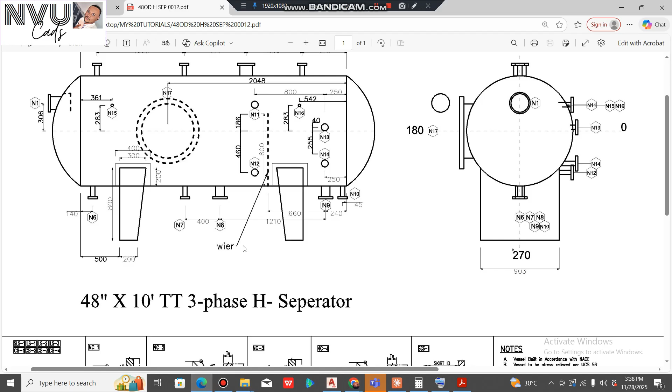I did make a post yesterday, I think, about a three-phase horizontal separator and about the mechanical drawing and how to model it. I said I was going to do a modeling of the horizontal separator based on the mechanical drawing that I also shared.

Well, this was because for some time now, some persons have reached out to me in one way or the other via WhatsApp as well as on LinkedIn. They wanted me to at least show some demonstration on how they can get started with modeling a vessel. I think some persons have asked because they got stuck along the way, and after trying, they actually couldn't find what they were looking for, so they had to ask that I guide and help direct them on how they can get familiarized with it.

So I decided to do this demonstration so that it solves the problem of those that asked me to do the demonstration earlier, and those that just asked me recently, so that if they could get their hands on the video of this demonstration, it would be able to solve the challenges or whatever questions they need answered. So that's why I'm doing this demonstration, and I'm going to, as fast as I can, touch this mechanical drawing and help them get a better understanding of it.

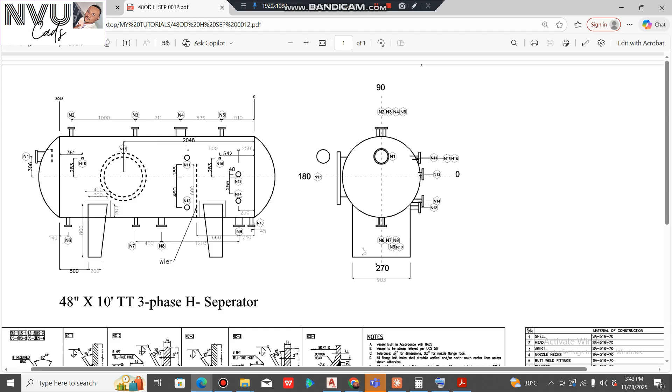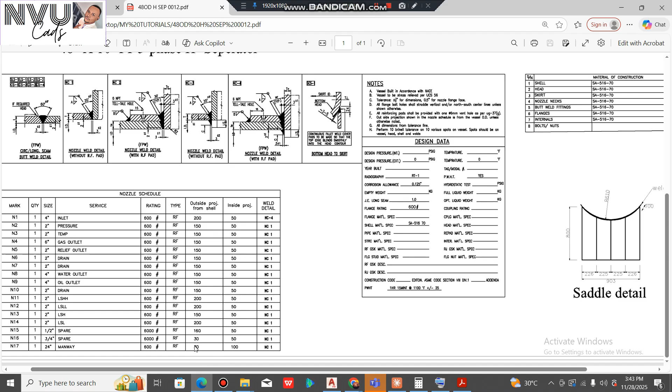So we have this drawing. This is the side view, this is the front view, and then this is the nozzle schedule. Also in this nozzle schedule there were some little changes that were made. Okay, so it may also not be perfect, but along the line we'll look at it. Then we have the saddle details. This saddle detail, we would only be working with the length, the height and the length of the base, because the other details are just for fabrication.

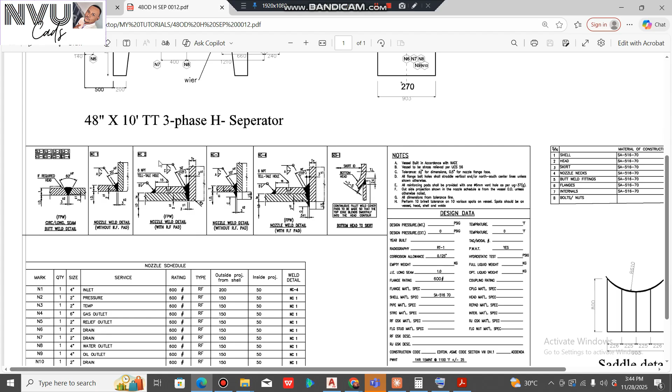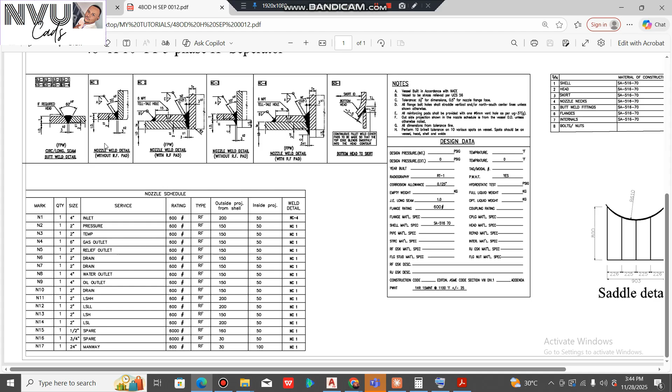So let's dive in. This is a vessel that has quite a lot of nozzles, as well as a manway and a saddle. So the nozzle schedule has been outlined here: the rating, the type, which is raised face, as well as the outside distance. This is actually the projection of the nozzle. Some nozzles are projected more from the vessel, while others are not. And these are the inside projections. What you also have here is weld details. This is actually what the welding engineer would be interpreting for fabrication. So we'll not really be going into all of this.

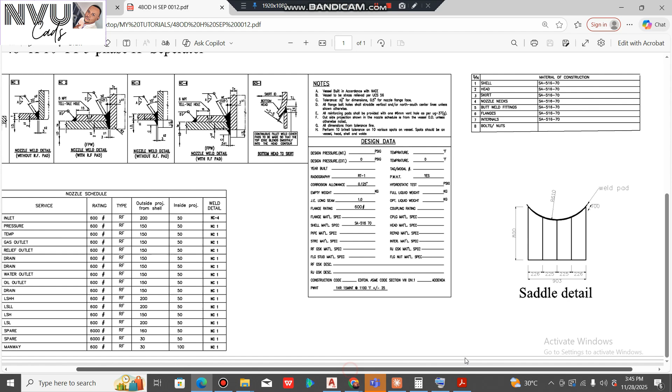What we'll be focusing on is the vessel: the 2D drawing showing the front and the side view, the nozzle schedule, and the saddle details. So we'll be interfacing between this and the software to get information and move on. So that's it. Let's go straight to the software. I'm using AutoCAD Plant 3D, which is my basic software that I use in process piping designs and every other activity. So I've created a project.

I created this project using the option of mixed, which is imperial and metric, and it just makes it more flexible, so you're not limited to either of the dimensions. So I presume all of those have been done, and this interface also, I presume, before we get to this stage, we must have understood what the interface is. So I will not be speaking about those. I'm just going straight to the design.

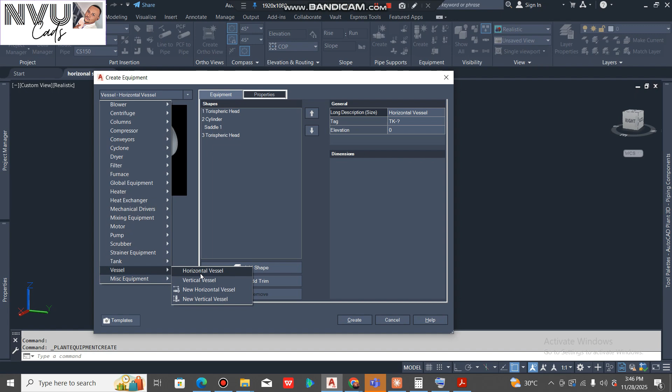So I've created a drawing and I'm opening it. This is what it is. So this is a blank drawing. We don't have anything. So to begin, I go straight to my home tab, and then equipment tab. AutoCAD has been able to give us quite a lot of equipment that we can work with, but we're going to a vessel and then a horizontal vessel, which is what we'll have.

Now, I tried doing a little demonstration before this video, while I was testing the mechanical drawing, because I needed to test it to be sure that it's workable. So I still have some information that would now be left in the memory of the software. So while we are working, there are some places that I wouldn't need to input. I will just explain because I had already inputted them, so you'll just be seeing them on the screen like pre-populated.

But however, once you select your vessel, the system automatically generates the torispherical head, generates the cylinder, and generates the other torispherical head. As a horizontal vessel, it has two dish ends, one head on one side and the other at the opposite side. And typically the cylinder must have its saddle, so that's why you're seeing this saddle under the cylinder. The saddles are like the legs, and since this is a horizontal vessel, it has saddles.

Vertical vessels come with skirts rather. So if it's for a vertical vessel, what you'll be seeing here is a skirt, or in some cases you have legs, which are like tripods, or in some cases 4 legs or more. But in this case, we are just dealing with a horizontal vessel, which has saddles. So these are what we'll be editing based on that drawing that we've seen before we start inputting the nozzles.

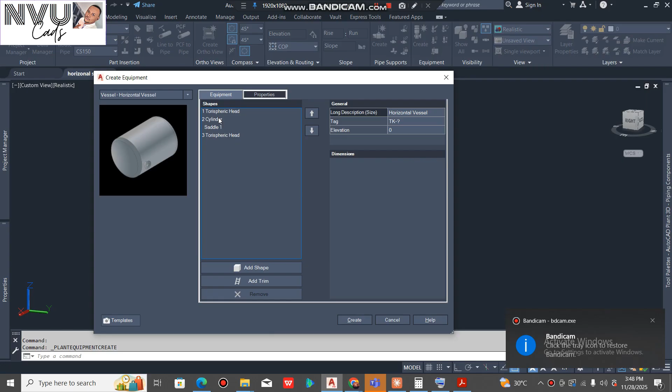Okay, so now let's include the cylinder. For the cylinder, we have to input the diameter, which is given here as D, and the height, which is given as H. The system has been built in a way that once you determine the diameter of this, that same diameter will automatically be assigned to the heads, the dish ends. So if you use 60-inch, the torispherical head will change to 60-inch.

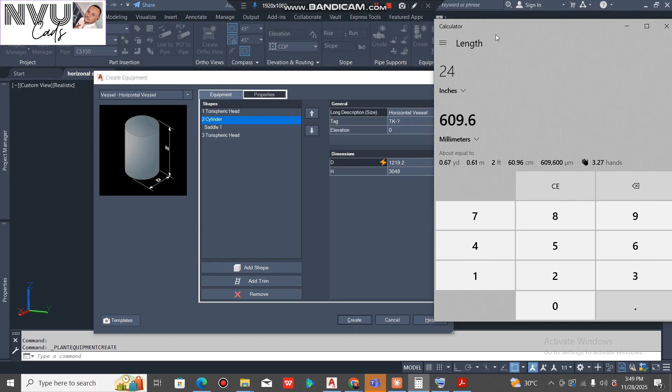If you put the diameter here as 24-inch, the torispherical head will be changed to 24-inch. That's how easy the software has made our job look. So in most cases when I'm doing this, I use a calculator, because the calculator helps me to convert easily and get what I want. So we are using the calculator and want to input the diameter of this vessel.

So if you go to our drawing, you see that this is the dimension of the vessel that was given. Usually it comes in this way. Diameter usually comes first before you see the length. Diameter is in inches while length is in feet. So once you see this, you should understand that this is a 48-inch diameter by 10 feet length vessel. So 48-inch is what we'll be converting in our calculator.

Once we input 48-inch there, it will convert it directly to millimeter, because what we are working with here is in millimeter. So you are having 1219.2. I told you I've done this before, so this is already in the memory of the software. So if you've not done it, you can input your own value here, 1219.2.

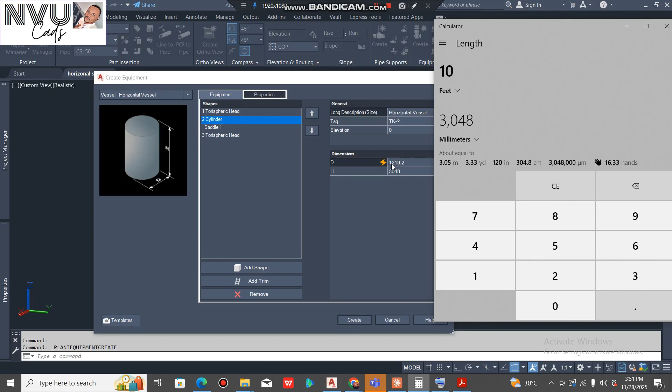Now the next thing we are looking at is the length, which in the software is called a height. So convert this from feet. This is how I do it, and I put 10 feet. 10 feet is giving me 3048 millimeters, 3.048 meters. So 3048 is what you input here. So once you've done this, the software automatically generates the other ones.

You see the torispherical head is having the same number both up and down. Now let's move to the saddle. Now I told you the saddles are the legs for each of these, the two legs that the vessel carries. Saddles are usually in pairs, especially for vessels like this, except in some rare cases which will not be discussed here. It's usually in pairs. Let's not go there. So that's basically what it is.

So what we'll be starting with now is the saddle height. This is telling us that our height needs to be calculated from the middle of the vessel to the base of the saddle. From the middle of the vessel to the base of the saddle. That is what the height is going to be.

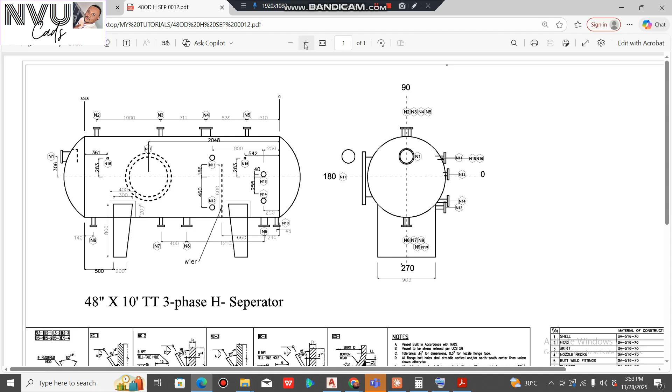If we look at our design, we realize that this information is not how it was given. The way the software is requesting it is not how it was given in the design, but we'll have to figure it out. Now let's look at the drawing closely. What it's simply asking is the height from this point down, looking at my mouse, to this bottom of the saddle. But what we're given here is just the height of the saddle from here to this point, meaning that we don't have the other ones.

And we also see that 200 has projected into this part of the vessel. So what we have left from this line down to this place will have to be 600. So to get the total length, we now have to take half of this and add it to the 600. That will give us the total length, which is what the software is asking.

So to do that, let's go back to our calculator and convert back to inch. Since the total of the vessel is 48 inch, half of it will have to be 24. So let's look at what 24 inch is in millimeters: 609.6. So 609.6, we'll now have to add it to 600. Let's copy and go to standard calculator, paste it, then add 600. The 600 is the remaining part of this saddle, since 200 has already projected into the vessel.

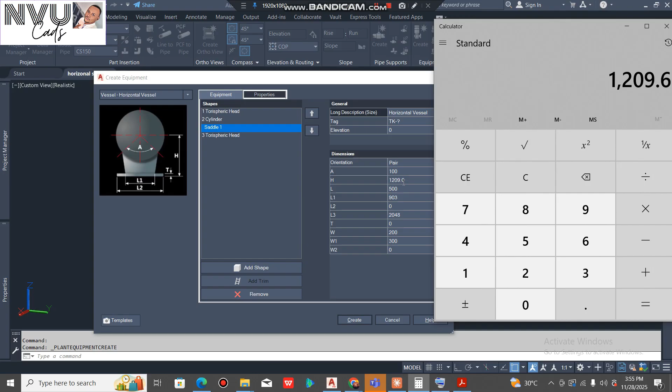So adding plus 600 equals 1209.6. So this is what our height is going to be. And like I said, I've done this before, so we have it already pre-populated here, 1209.6.

Now our length, which is L, I want to follow this serially so we don't miss anyone. Our L is the distance between the tan and the middle of the saddle. In this case, it was not given exactly the way the software wants. Sometimes the way the software is designed would not be the same way the mechanical drawing is designed, so we would have to do addition and subtraction to get what we want. Since we are only given 500 from this point to this point, we have to look for the middle of this, so that once we add it to 500, we'll get what the software is asking for.

Now, bear in mind that in the software, it was stated at the top, but in reality, what they use is the base, not the top. That's why if you look here, the arrow came down to this point, else they would have used it somewhere here. So it's the base that is the reference. So it is this 200 that we are looking for the middle of, not the 300. If we take half of this 200, the length of the base, which is 100, and add it to this 500, we get 600, and then we input 600 in our software.

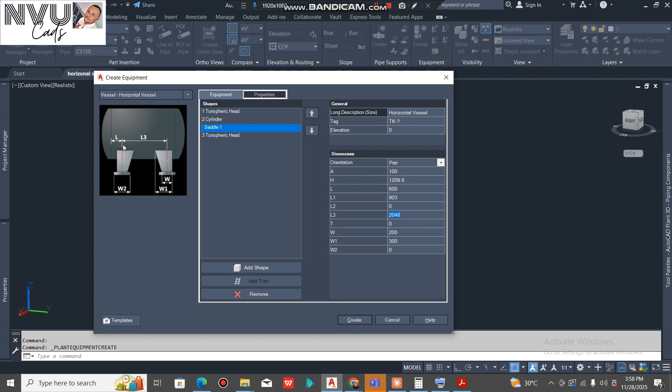And our L2 is this length. If we look at our design, we do not have any base plates for this saddle, meaning that in this case L2 is not applicable. That's why L2 is 0. Now our L3 is the distance between the middle of this saddle and the middle of the other saddle. Now we'll go back to the software. There's something I want us to understand.

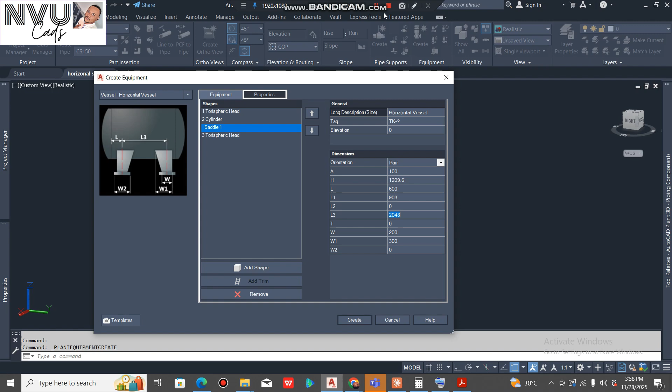Whatsoever, let me use the software rather. Whatsoever you're having as our L here, once you input it, the software will assign the same thing to the other side. Software will assign the same thing to the opposite side. Understand? So if we are having 600 here, that means this place will also be 600.

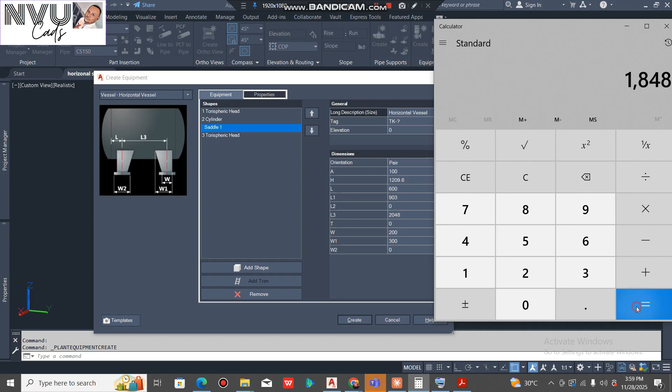So once we have that at the back of our mind, it will now be 600 plus 600, that is 1200. So for us to get the center to center of this, we have to minus 1200 from the total length of this vessel. To do that, we go back to our software. Our total length is 3048. So to remove 600 plus 600, it should be 1200, so it should be minus 1200 equals 1848. So this is going to be what our L3 will be, 1848. So L3, 1848. So we are progressing.

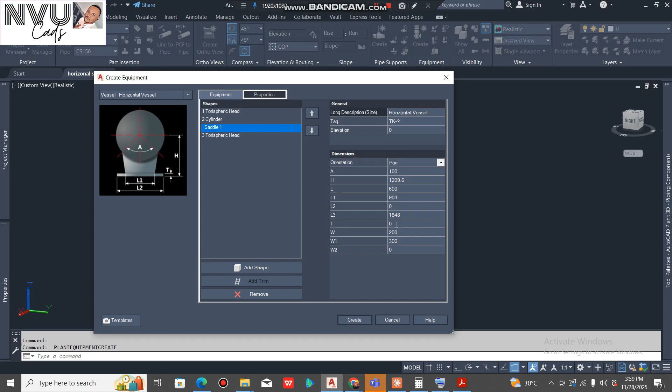Our T is now the thickness of the base plate. Initially, I've told you that we don't have a base plate, which is why we put 0 for L2. The same thing will be applicable here. We don't have, so T will be 0. Now I have W. W is the width of our saddle base. So from our software, the width is 200. So that's why we're having 200 here.

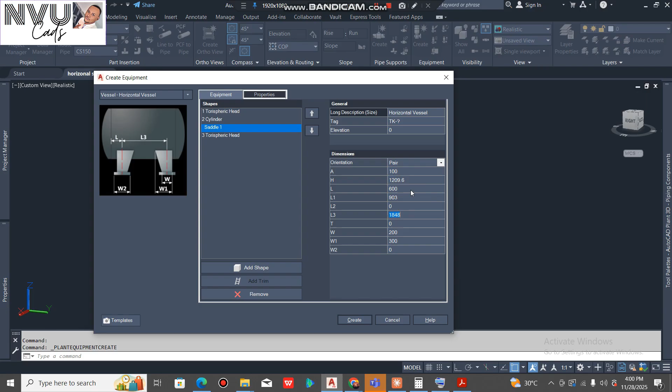And then W1, which is, for trace, you see it's the top of the saddle. In this case, we are having it as 300. So the 300 we have here. And then W2. W2 is also that base plate that we don't have, so that's why we're still having it as 0. So at this point, we've been able to put in everything that the software needs from us, and so we can create. Fine.

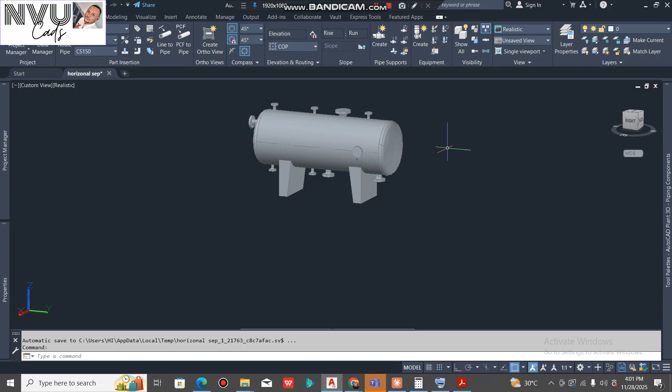Okay, I just noticed something. The vessel I created initially is still here. So what I will do is I will just remove all the nozzles and create them again, so that it's not confusing, so that everybody would be able to follow. So just give me a few minutes. Let me delete them.

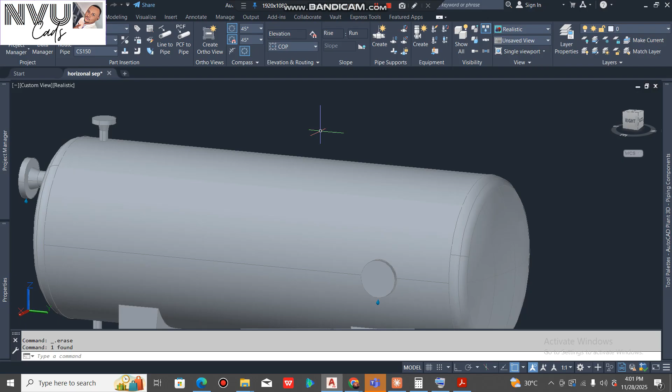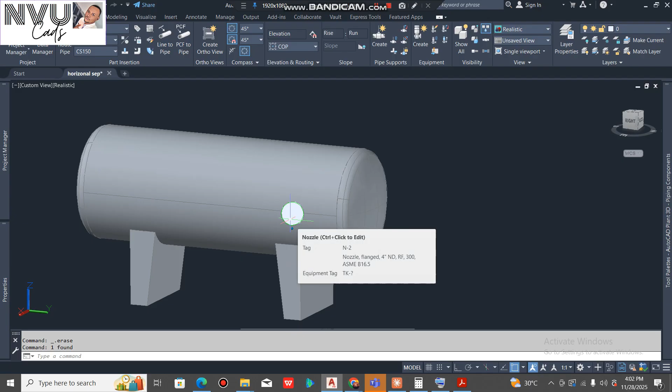Okay. Okay. Okay. Sorry. I just want to have them deleted, so that we create a new one. And the last one.

However, not sometimes, always, once you create a vessel, the system automatically generates some nozzles for you. So you can modify, but in this case, I've just deleted both the ones that I created and the ones that the system created. So we will not be having any nozzle on the vessel until we start creating.

So I want to explain something before we move. For these two dish ends, these torispherical dish ends, one is usually considered the head, the top rather, and one is considered the bottom. If we look at our drawing, we realize that one part of it starts with 0 and the other part is the end. The system recognizes this dish that starts with 0 as the bottom, and this one that gets to the maximum length of the vessel is where the system considers as the top.

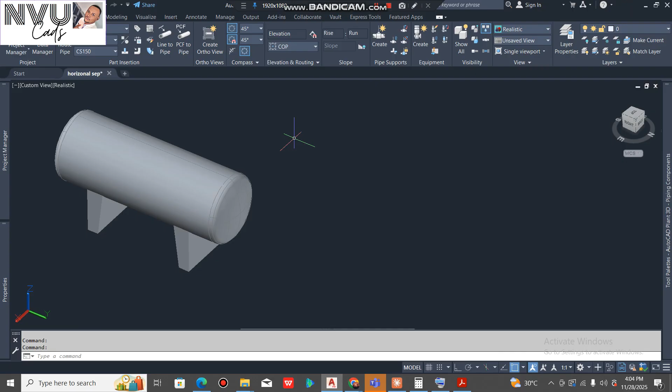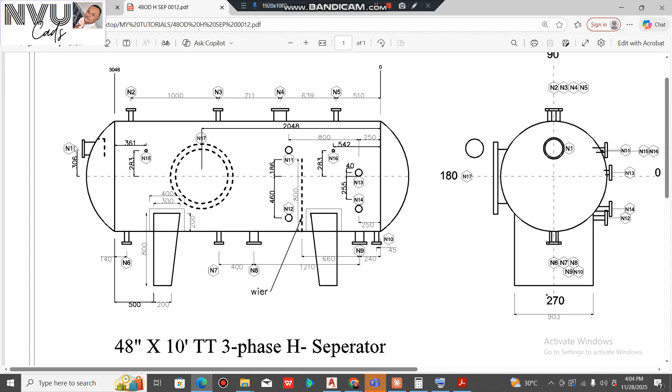Yeah, so we would use that reference to help us know how to position nozzles. So having created a vessel, let's look at it closely. Fine, so everything looks fine now. So I want to create a nozzle. So let's get to the drawing rather. I want us to start with N1.

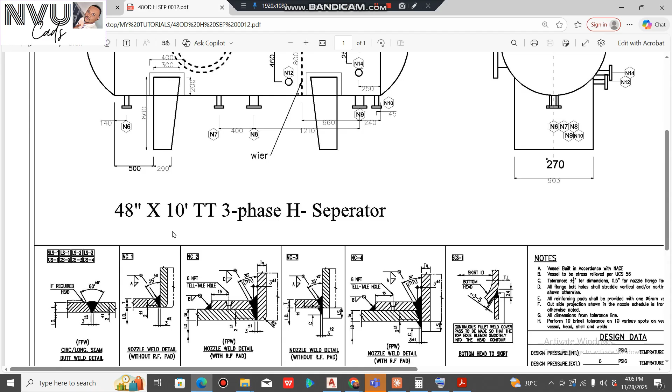N1 is this. If we look at our nozzle, see that N1 is a 4-inch nozzle, 600 pounds rating, raised face, 200 projection. So it's a 4-inch. So we create: right click, add nozzle. Now this nozzle, I've told you that it is at this side. So where you're having this is top, this is bottom. So I have to put this nozzle at the top on the software. So we choose here and we'll go to top.

The nozzle comes here. So we'll do modification. Now it says radius. Radius, in other words, is usually the distance from here to where you have the center of the nozzle. That is the radius. If it's for the top, it's the distance from this reference to where you have this, or where you have this.

So in this case, the radius here will be 510. In this case, the radius here will be 306, because the software sees a reference on the dish. It sees the reference from the tan, which is this. But for here, it sees the reference from the center line. Yeah, so it's either you reference it up or you reference it down. As we progress, we'll see that.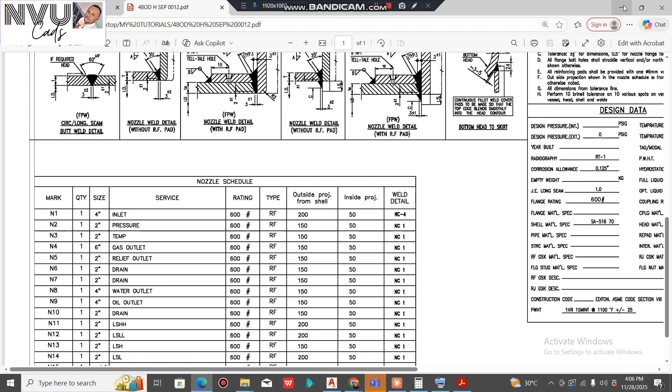So in this case, our reference for this nozzle is 306. So we input 306 here, 306. Then our length, as we've seen, which is the outside projection, is 200. So we go back there, we input 200, and then angle. This angle now is also what we'll be looking at.

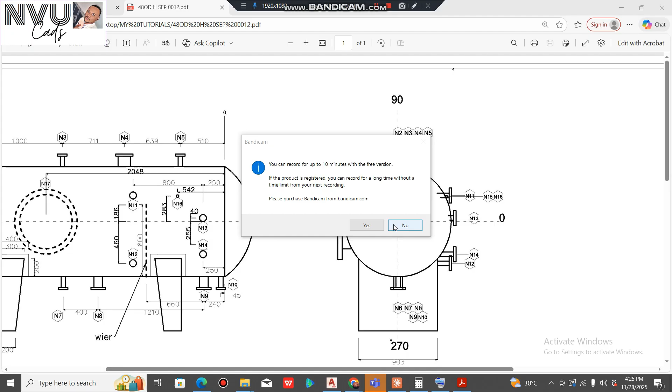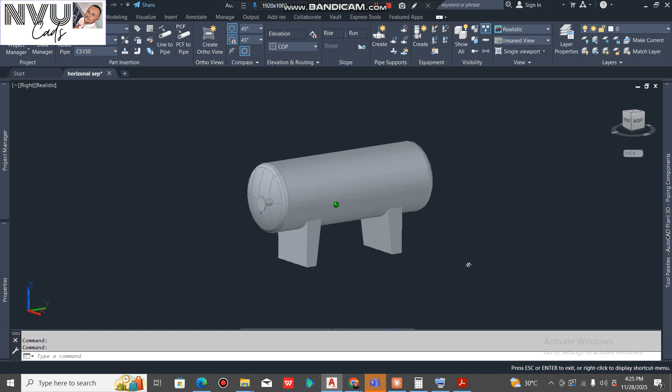Now let's look at this. Let me explain, because once we pay good attention to this place, it will guide us. Let me put this in 3D dimension so that we can easily see what we are doing with the nozzle. Okay, so if we look at this now, we realize that this nozzle is, in this case, at our right. And if we look at this, we realize that it's somewhere here, which means it is at 0, and it shouldn't be. We should have it up, which is at 90. So this is going to be our angle.

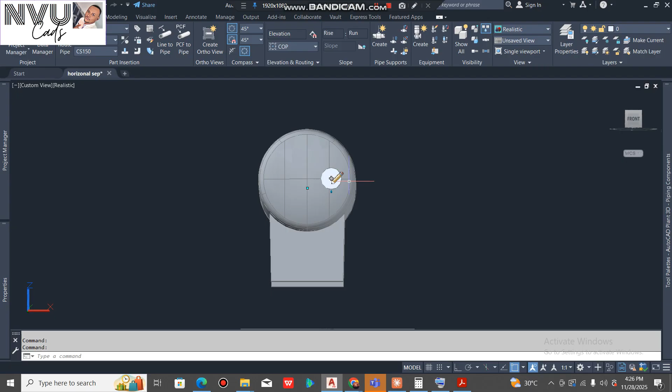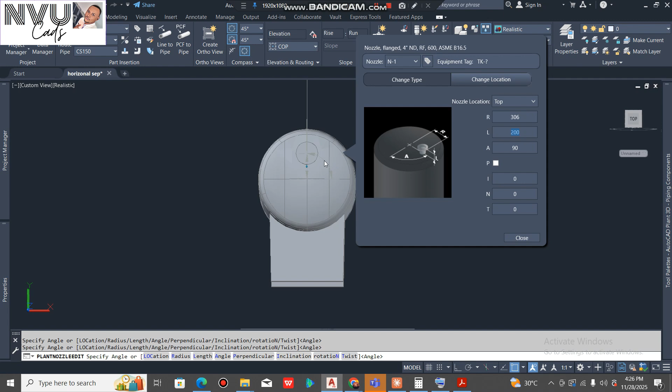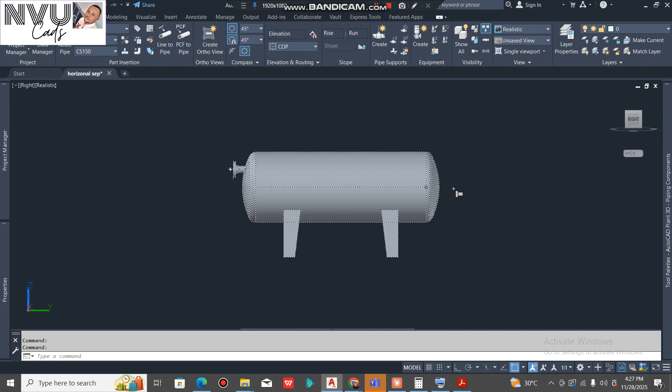So we go back now. We hold our Control key, and then click the mouse on the nozzle and click on the pencil key to take us back to where we'll modify the nozzle. So we are changing the location. This is the place we are putting 90. Like I said, 90 is top. If you look at it, you see that it has gone up. You can now see that the nozzle is now at the top. So you can view it this way, just like it's appearing on the mechanical drawing.

So next is the nozzles. Like I told you, it takes a reference. To deal with the nozzles at the top, we'll be referencing from here, which is the bottom. And then we'll do all the nozzles. You will do a few at the top on your own. So I'll just show you how we do the first two, and then how we did the other ones below.

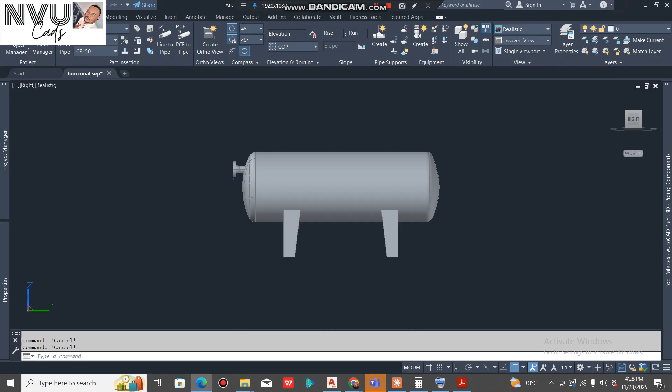Now let's go. The first nozzle is N5, and I want to start here because it's easier. So this is N5. It's 510. N5 is a 2-inch nozzle. Every other thing is the same, but the projection is 150. And then the distance, the radius R, is 510. So we'll now go here, right click, add nozzle.

So now this nozzle is radial. It's okay. If we had wanted it at the other ends, it would have been either top or bottom. But now we want it at the shell, so it's radial. That means it's correct. The length is 510, just like I showed you in the diagram. So we input the height, in this case 510, which is the distance. The outside projection is 150, and the angle has to be 90 because it's at the top. So bear in mind it's 90.

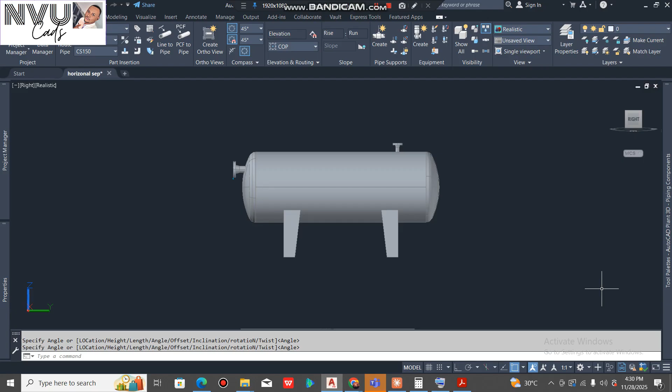So we'll modify the type of nozzle. 4-inch nozzle, 600 pounds, straight nozzle, and then it's 2-inch. Okay. So the next nozzle would also be radial as well. So what we are doing now is N4.

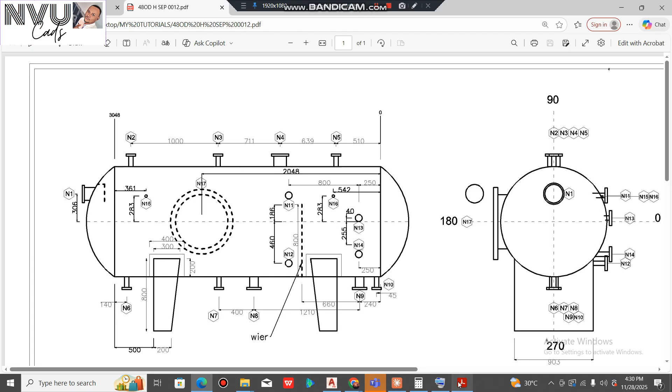I now have to add 639 to 510 for us to get the distance. So 510 plus 639, 1149. 1149. So that's what we are adding here. 1149. The projection for N4 is 150 as well, and it's a 6-inch.

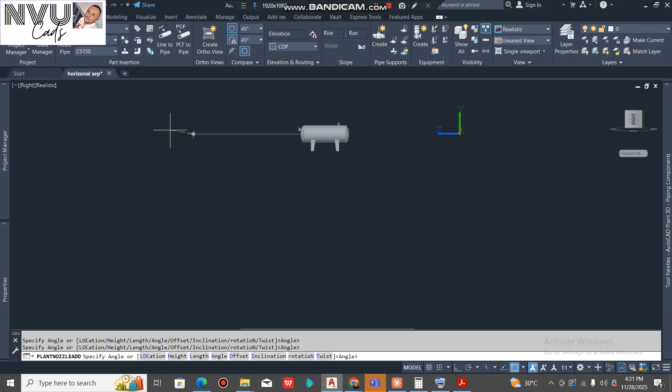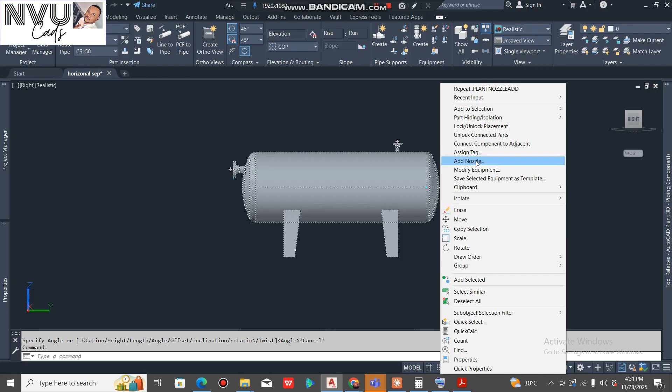Sorry, I think there is a mistake. Let's redo that. This is 90. This is 150. What did we get here? 1149. Yeah, so we move to the type. It's a 6-inch, 600 pounds, raised face. So I've done these two.

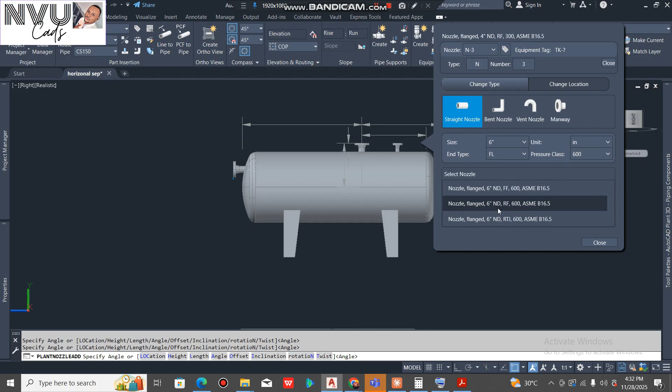I would go down and do these other two that we have below, then do the manway. The other ones can be done later. So the same thing, go here, add nozzle. This time around, it's still a 2-inch nozzle, which is N10. N10 is still a 2-inch nozzle, 600, 150.

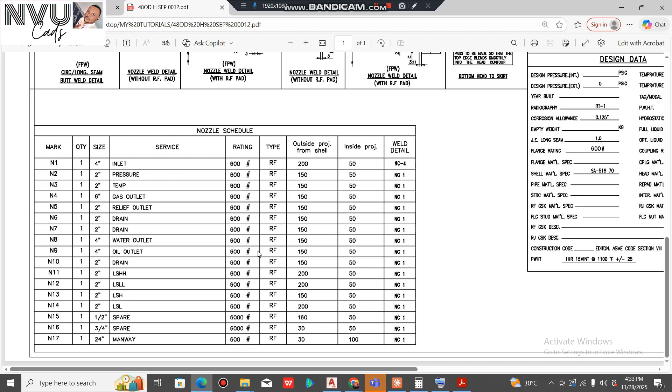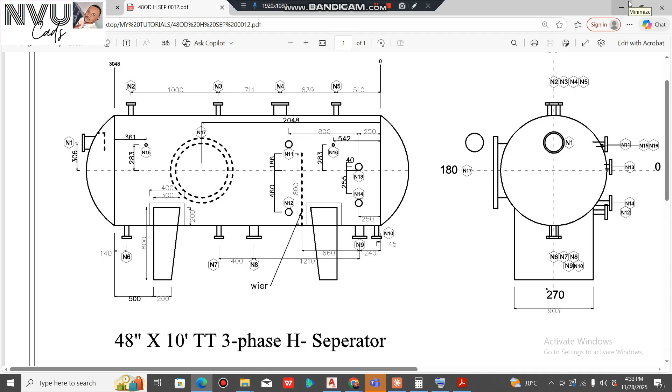So the distance there we saw is 45. From the center to this is 45, which by standard is not right, but I'm just trying to demonstrate. 45. And length is 150.

Then this time we have it below, and below is 270. So we put 270. It has come down. We change it to 2-inch. It's a 2-inch and 600 pounds raised face. So we close, and then let me generate the last one that I said I will. Other ones you can practice and generate yourself.

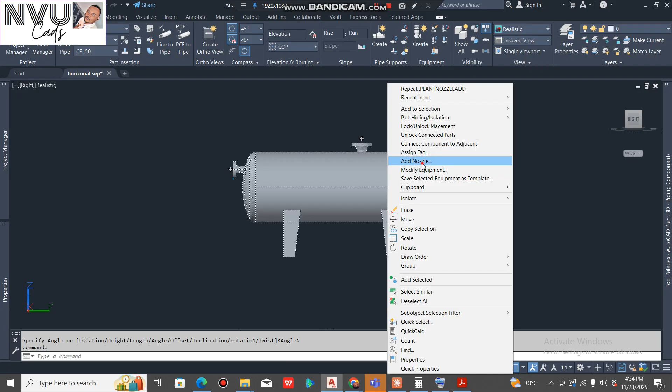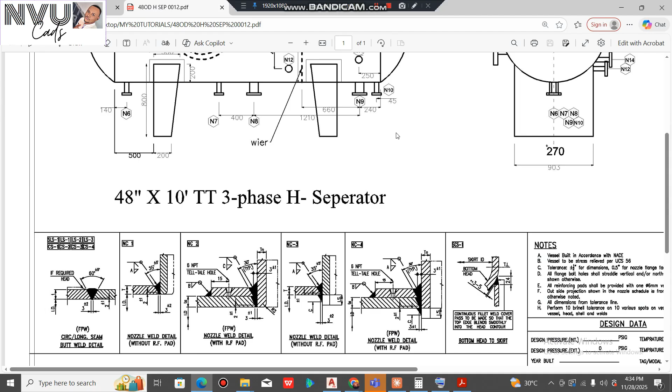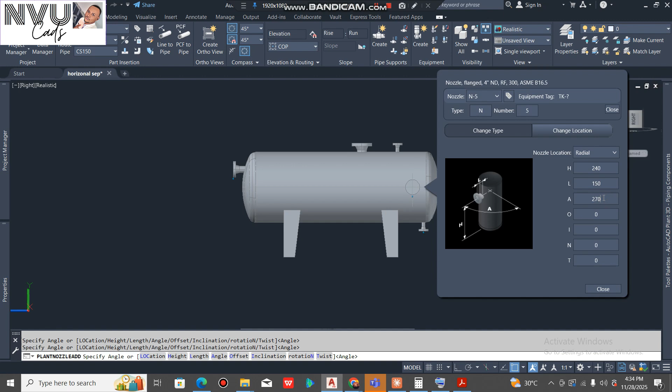So add nozzle, and so that one now is N9. N9 is 4-inch, still 150. And then the length or the distance is 240 from the tan. So this is 240. 240 is still 150. Is still 270. I go here. It's 4-inch, 300 pounds.

So we'll close. If we look, you see that both of them are clashing. I'm just doing this for this sake. Else, we can still modify. We can just increase this, even though it's not what you have on the drawing. We can just increase the distance of this to 300. Okay. So it gives it a little gap.

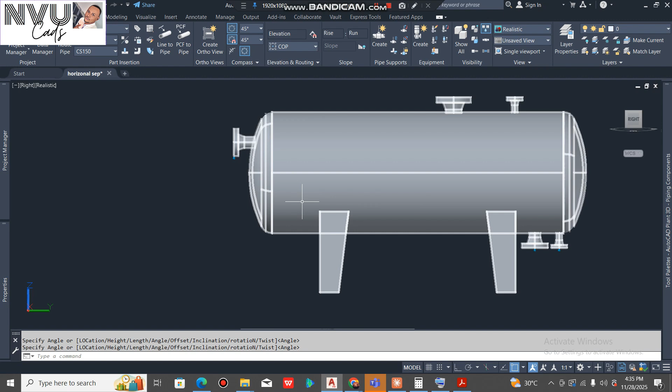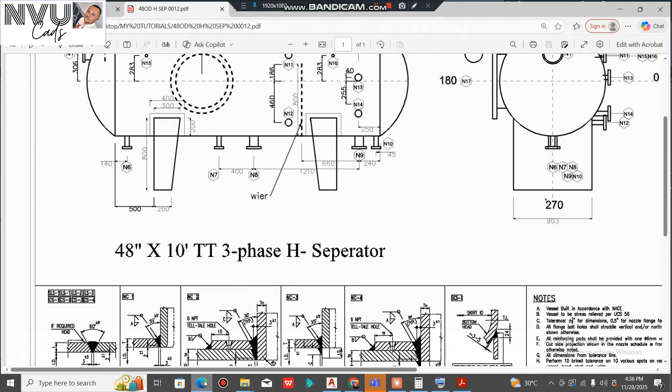So I've done these two nozzles at the top, done two below. We can try to do the rest, but before that, I want to also do the manway. So if we look at this drawing now, we'll now have it looking like this. We have the nozzle here. We have this. We've not done this. You do this on your own. So what we want to add is the manway.

Now, if we look closely, we'll see that these ones are by the side, unlike this one that will have top and bottom. So it's either 0 degree or 180. Now our manway is at the left hand side, which means it's 180. And our manway is also at a distance of 2 meter 48, which is our manway N17, a 24-inch manway, 30. That is the projection outside, which I believe is an error. It's supposed to be 300.

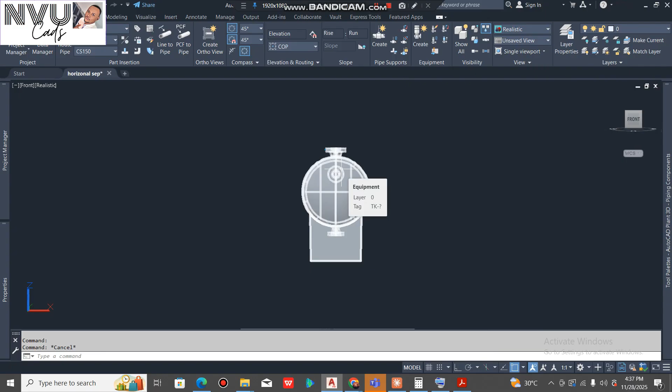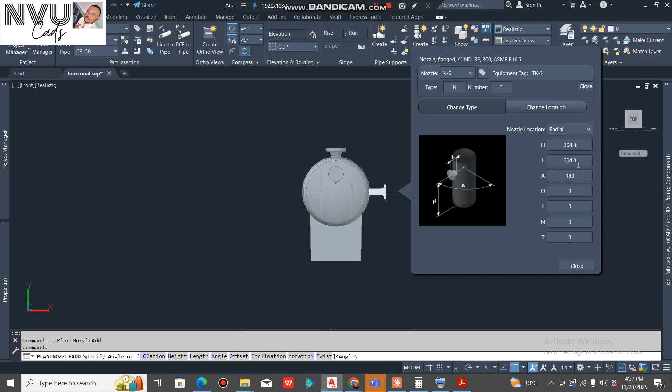So let's create a manway. We click here and we add nozzle. It's creating this nozzle at the right hand side. Meanwhile, from our drawing, we need it at the left hand side, so we change our angle here to 180. It has gone to this other side, and we change our length to 300. And our height, we leave it at where it is, because we just need it to be centered.

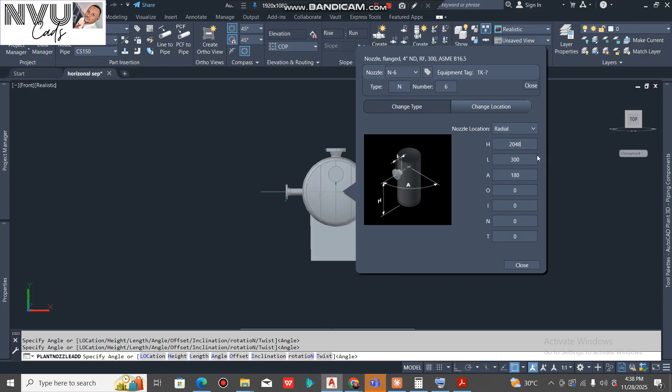Okay, no, our height rather, sorry. Our height, which is the distance from 0, is 2 meter 48. So we input 2048. Now we change this type. What type is this? This is a manway. So we choose manway here.

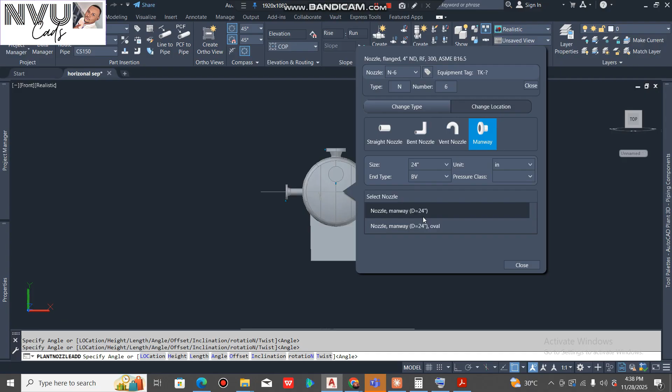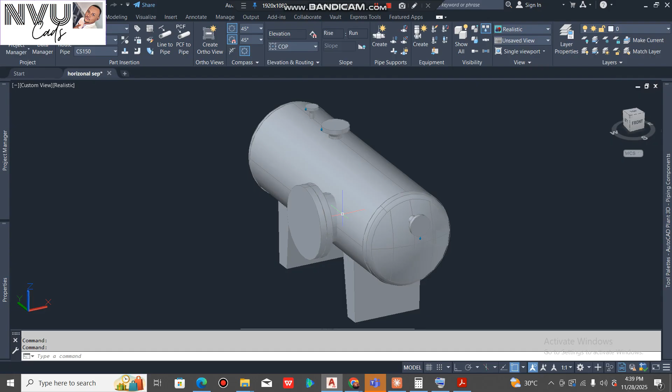It's a 24-inch manway. Pressure class does not really matter. Manways are designed in a way that they are massive. So diameter is not oval, it's round. So we just choose this and we close. So we have the manway now, and it's okay. So this is how it is.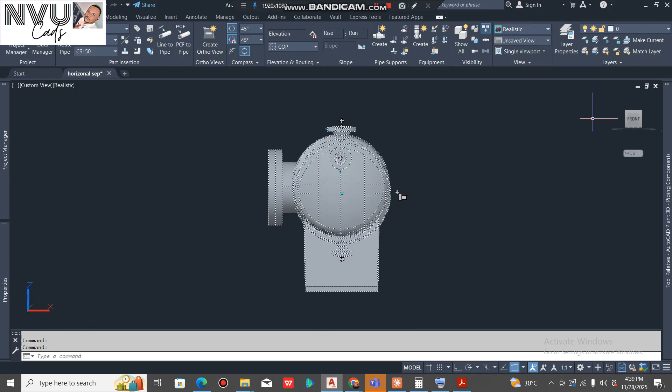So the last part of it now, what I want to create is the other nozzles at the right hand side, like the bridle nozzles and every other thing, which are these nozzles that we have here. These are 0. So we'll go back and we create. I want us to start with this first nozzle, which is N11, and then we can go with the other.

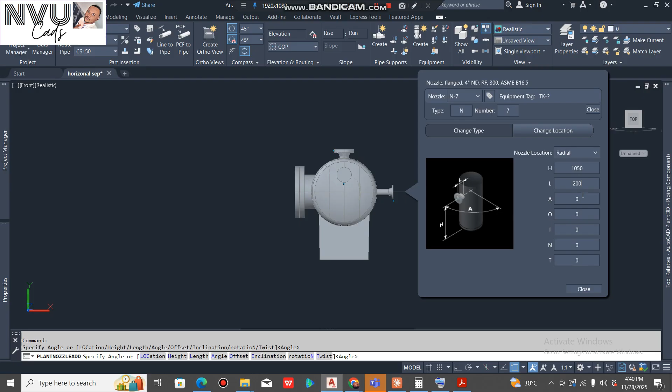So this is N11. And N11 from here is a 2-inch nozzle, 200 length. So we create it. But the distance is, this is 800 and this is 250, so that is 1 meter 50. So we have 1050. The length is 200 projection. That's what we have, and it's good at 0. So we change it to 2-inch, 600 pounds. Select it. We are good to go. We'll close.

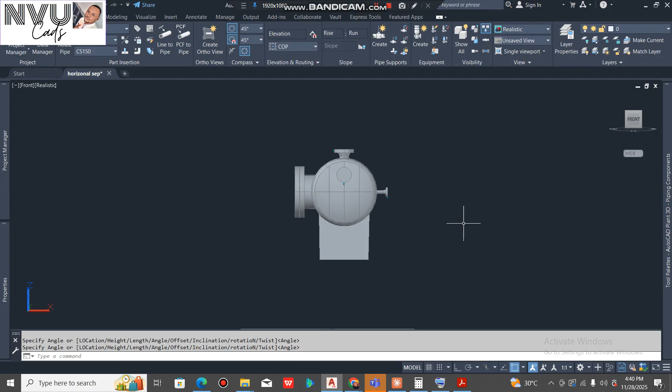We are not done. Now if you look, you see that it's at the middle, right? From the drawing, it's supposed to be at a distance from the middle. So we have to go back and modify and input 186. So we go again to the software, the nozzle control, select it, and go back to changing the location.

We'll have this, then we'll have the 0. 0 is now the offset from here to where we need it to be. So from here, what we have is 186. So we input 186 here, and it goes up.

Okay, so create the next nozzle. We use that one to do what I wanted to demonstrate. So we can add nozzle again. Yeah, so we want to create the second one, which is N12. N12 is still the same, 2-inch, 250. So then we'll create it the same distance of 1050. Yeah, that is... this is 150. Sorry, this is 200.

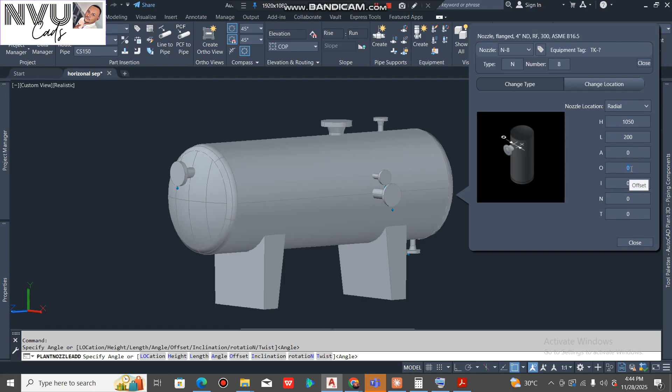So it's now for us to input what this will be. Looking at this, it's 460. The other one was 180. Now this is 460 away from the middle. So at 460, instead of inputting 460, we'll make it negative. We'll put minus 460. You see that it comes to the bottom. So once you add minus, it brings it down.

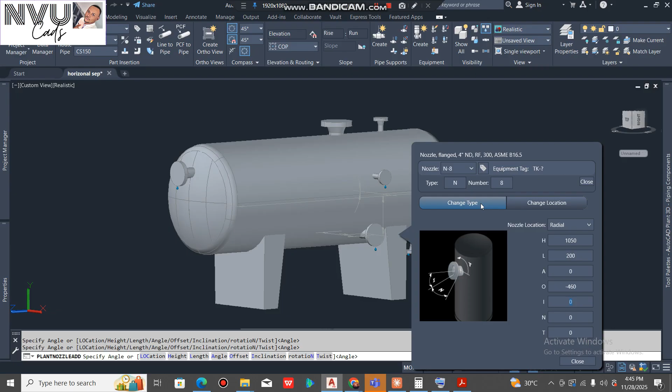So we can change this type. It's 2-inch, 600 pounds, raised face. So we'll close. Now we've been able to generate these two. Yeah. So let me do one more, and then I'll allow you to do the rest.

So let's do N14. N14 is also a 2-inch, 200. So it's almost the same as this one we've created. And the distance is just 250. So we click here. We create another nozzle again. The height here is 250. Okay, this is 200.

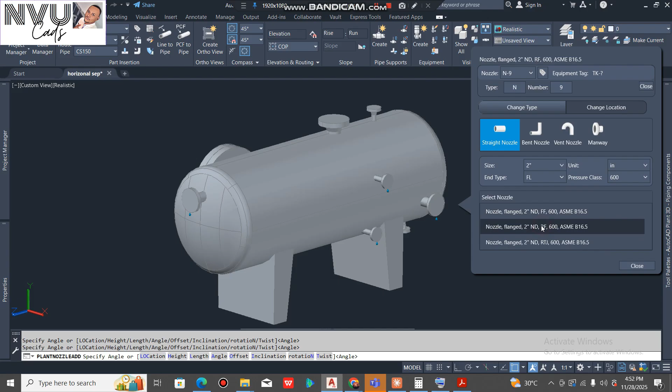So this is 200. The angle will now have to be, what are we seeing here? It's 255. I'm looking at N14, 255. So just like we did, it's still 0. It's still this side. So we are putting minus 255. Yeah, so it's bringing it down here. So now just change the size to 2-inch, pressure class to 600. We are good to go.

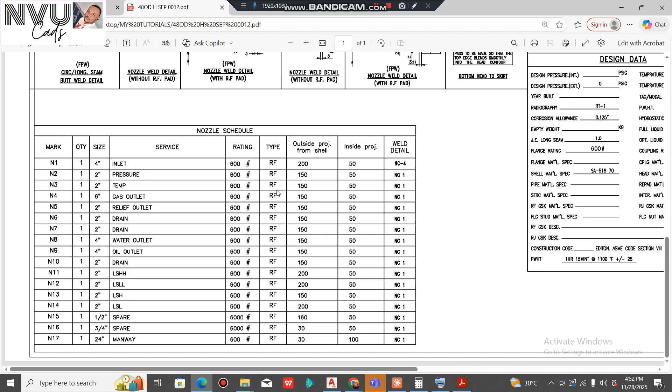Okay, so we have quite some others that you can create. I want to create one that is not a normal raised face flange, so that I can also demonstrate that for you. So we have this N16. N16 here is not a raised face flange. So the distance is 542, and it is a 3/4 MPT, 3/4.

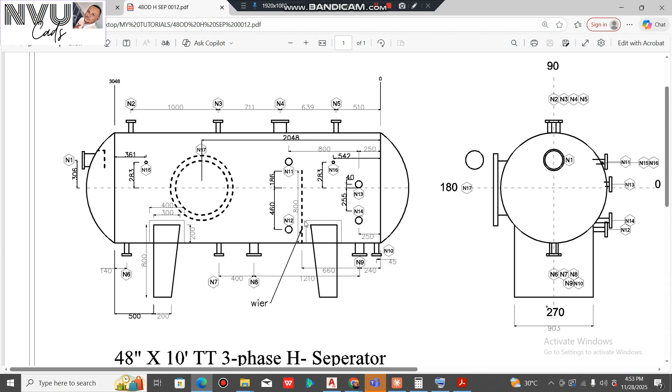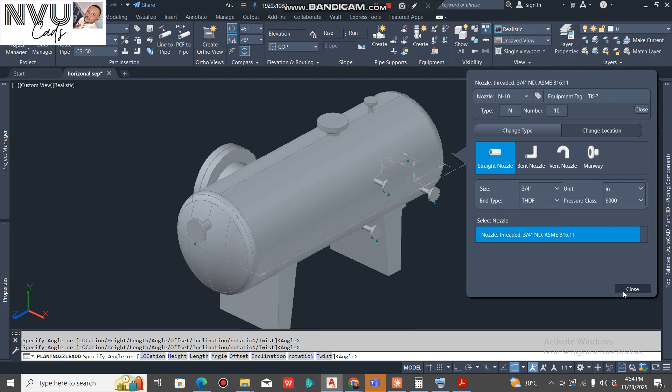We'll change it. It's not flanged, it's a threaded female. It's threaded female. It's 3/4 and it's 3,000. I want to use 6,000 rated. So that's it. And we close. So I've been able to do quite a number of them. So you can just practice with the others that we have based on how I've done this demonstration.

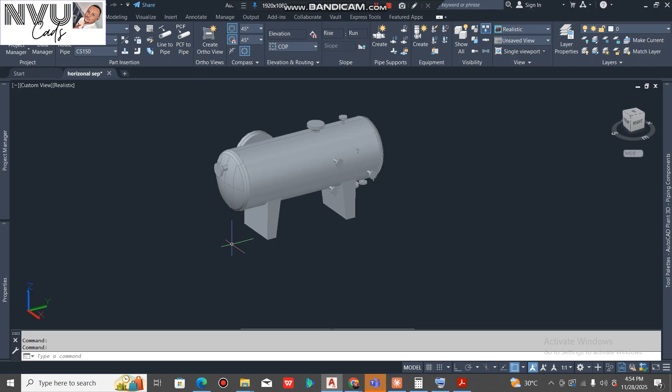I believe that you can do these other nozzles, these three below, and then these other two we have at the top. We still have N15 here. You will be able to figure this out yourself. And we still have N13 here. So by the time you're done with that, at least you would have practiced a little.

Now, mind you, if you look at this drawing, you'd see that we still have two dotted lines. These are internals. That's why I have them in broken line. Just like I used to say, to dive into this, you must have a basic understanding of oil and gas vessels. You'd have read about them. You should know that when you have a weir, you should not misinterpret it because it's a dotted line. Any designer would know that this is a manway seen from the other side. And this is an inlet diverter and this is a weir.

So these two are inside the vessel. I just use this to show. This is for fabrication, so those fabricating know that this is the distance where the weir would be. And this is also an inlet diverter. Details of this were not actually given, but usually details of it are given. So, well, this is the demonstration I promised. I think this is fair enough.